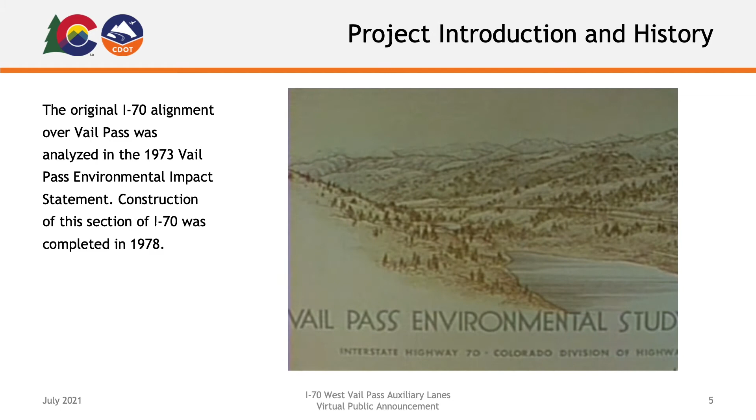The original I-70 alignment over Vail Pass was analyzed in the 1973 Vail Pass Environmental Impact Statement. Construction of this section of I-70 was completed in 1978.

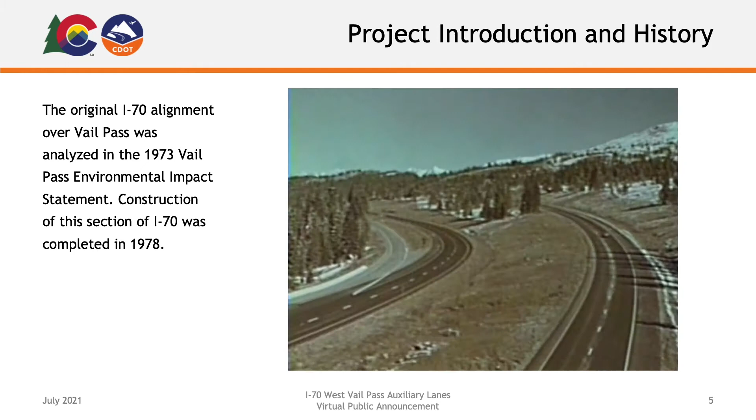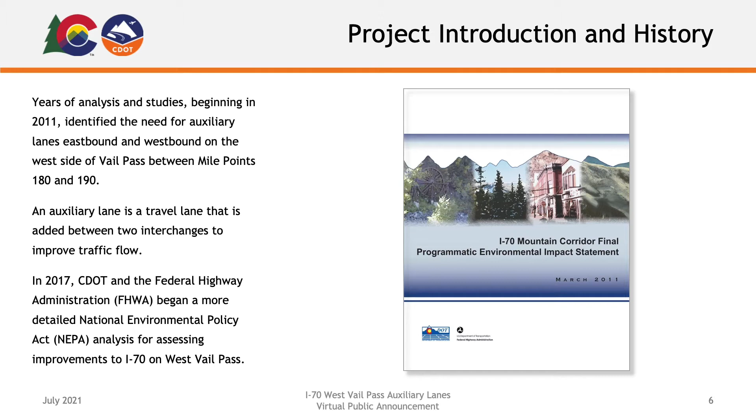Years of analysis and studies, beginning in 2011, identified the need for auxiliary lanes eastbound and westbound on the west side of Vail Pass, between milepoints 180 and 190. An auxiliary lane is a travel lane that is added between two interchanges to improve traffic flow.

In 2017, CDOT and the Federal Highway Administration (FHWA) began a more detailed National Environmental Policy Act (NEPA) analysis for assessing improvements to I-70 on West Vail Pass.

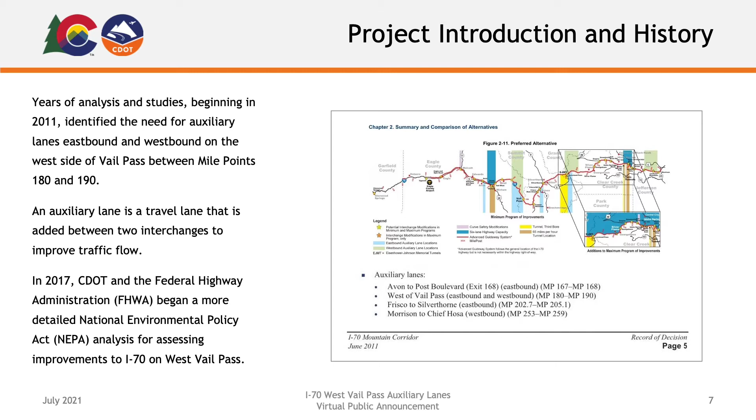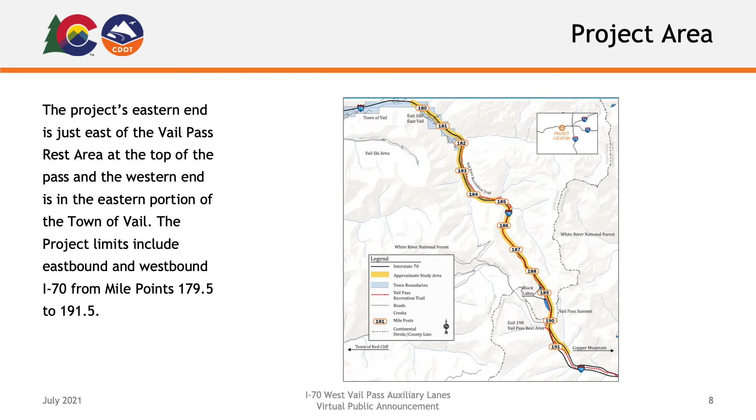The project's eastern end is just east of the Vail Pass rest area at the top of the pass, and the western end is in the eastern portion of the town of Vail. The project limits include eastbound and westbound I-70 from milepoints 179.5 to 191.5.

The project context statement and core values helped us to frame the unique conditions of the project, as well as the concerns and values to be considered during the environmental assessment (EA) and future decision-making.

This context statement was based on the original Mountain Corridor context statement and was further developed for this project through a robust process with project group members, resource agencies, and community members. The context statement captures in words the special qualities and attributes that uniquely define Vail Pass.

The project purpose and need statement was developed based on the I-70 final PEIS purpose and need, which identified safety and mobility issues on West Vail Pass related to speed differences between different types of vehicles, such as cars and freight operators or other slower moving vehicles.

The purpose of the project is to improve safety and operations on eastbound and westbound I-70 at West Vail Pass. Operations, as defined here, means how well traffic flows through an area, which can be affected by the number of cars and trucks, weather, curves, steepness of the road, and other features.

This project is needed to address safety and operational issues such as crashes, road closures due to crashes and weather, and passenger vehicles being stuck behind semi-trucks.

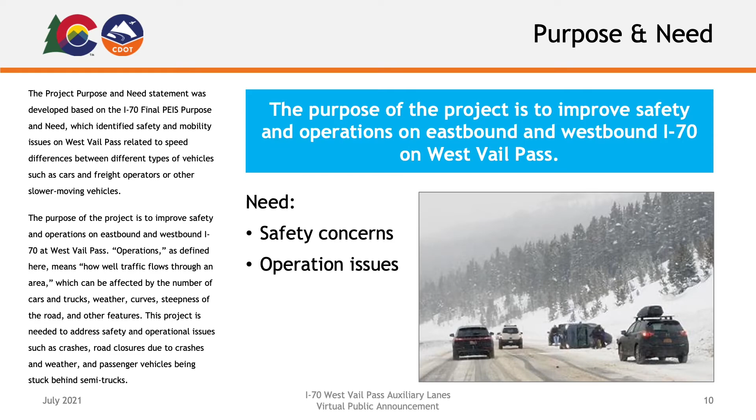In June 2020, CDOT was awarded a federal Infrastructure for Rebuilding America (INFRA) grant. This, combined with other funding sources, will allow for construction of the first phase of the project, totaling $140.4 million.

The INFRA grant, applied for in coordination with the Intermountain Gunnison Valley, Northwest Transportation Planning Regions, and the Grand Valley Metropolitan Planning Organization, will facilitate work on the areas of highest crash rates and greatest operational challenges.

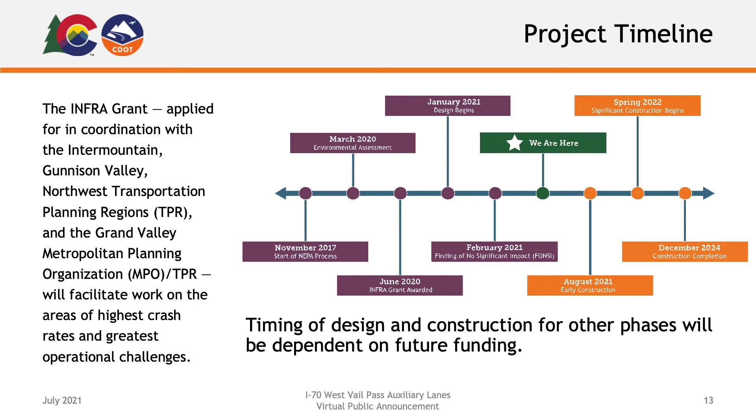Design of the Infrastructure for Rebuilding America (INFRA) grant improvements started in early 2021 on the West Vail Pass Auxiliary Lanes project that have identified funding.

These Phase 1 improvements include an eastbound I-70 auxiliary lane with widened shoulders between milepoints 185 and 190, westbound curve modifications with widened shoulders at milepoints 186 and 188, bridge replacement at eastbound milepoint 185.3, truck ramp reconstruction

at milepoint 182, highway closure system, 6 wildlife underpasses and fencing, 2 miles of Vail Pass recreational trail relocation between milepoints 185 and 187, improved signage and incorporation of an active traffic management system and variable speed limit signs across the entire project area.

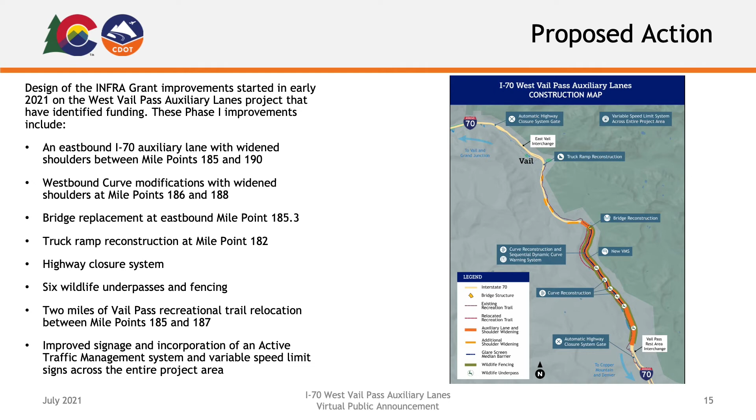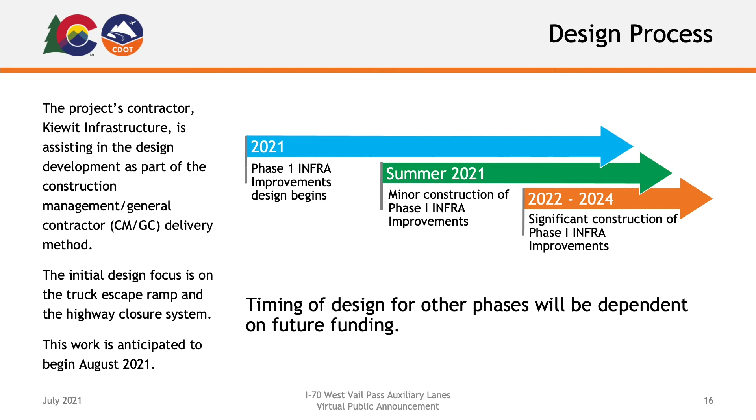The project's contractor, Kiewit Infrastructure, is assisting in the design development as part of the Construction Management General Contractor (CMGC) delivery method. The initial design focus is on the truck escape ramp and the highway closure system. This work is anticipated to begin August 2021.

As design and construction activities begin, CDOT, along with the design and contractor teams, will uphold the obligations and mitigation strategies developed throughout the CSS process and captured in the finding of no significant impacts.

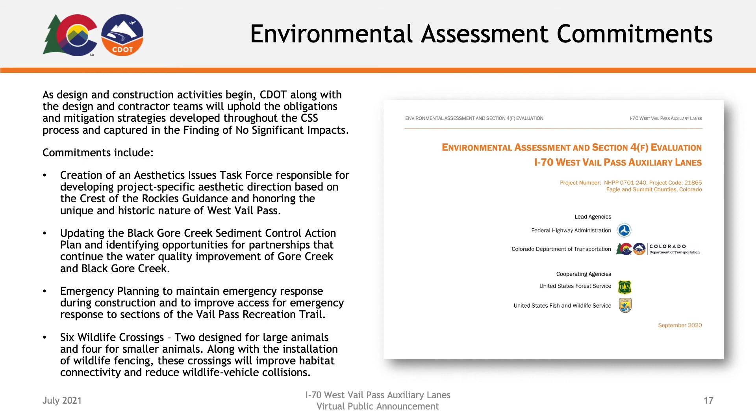Commitments include creation of an aesthetics issues task force responsible for developing project-specific aesthetic direction based on the Crest of the Rockies guidance and honoring the unique and historic nature of West Vail Pass, updating the Black Gore Creek Sediment

Control Action Plan and identifying opportunities for partnerships that continue the water quality improvement of Gore Creek and Black Gore Creek, emergency planning to maintain emergency response during construction and to improve access for emergency response to sections of the

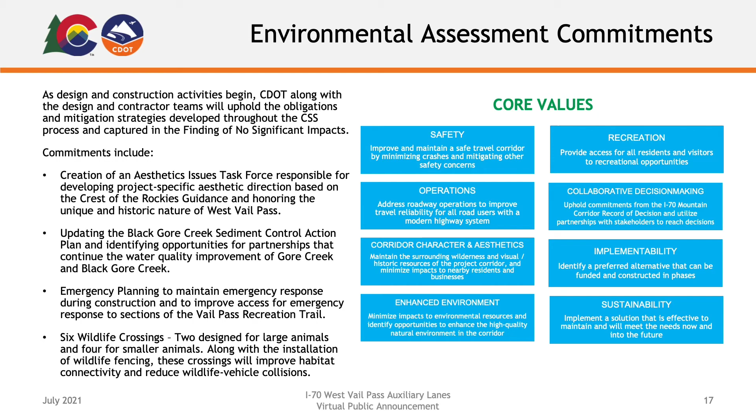Vail Pass Recreation Trail, 6 wildlife crossings, 2 designed for large animals and 4 for smaller animals. Along with the installation of wildlife fencing, these crossings will improve habitat connectivity and reduce wildlife vehicle collisions.

Minor construction activities that should have little effect on I-70 traffic are scheduled to begin in August 2021. These initial construction activities will focus on reconstructing the truck ramp near milepoint 182 just east of Vail and installing a highway closure system near milepoint 190 at the top of Vail Pass.

The truck ramp will be closed during construction this summer and fall and is expected to reopen by the end of 2021. The recreation trail will remain open. Construction flaggers will direct trail users to help maintain a safe buffer between construction.

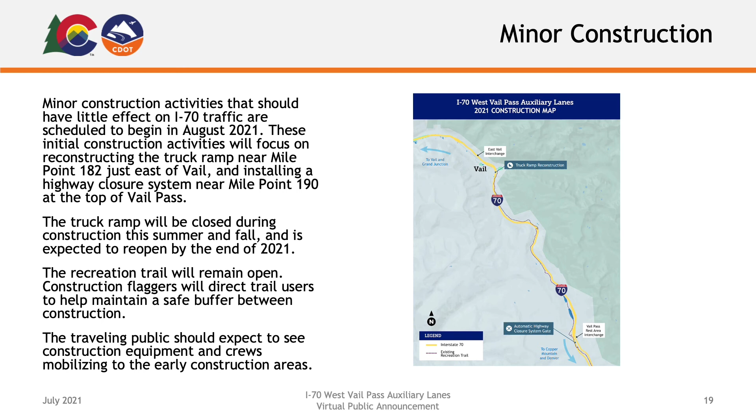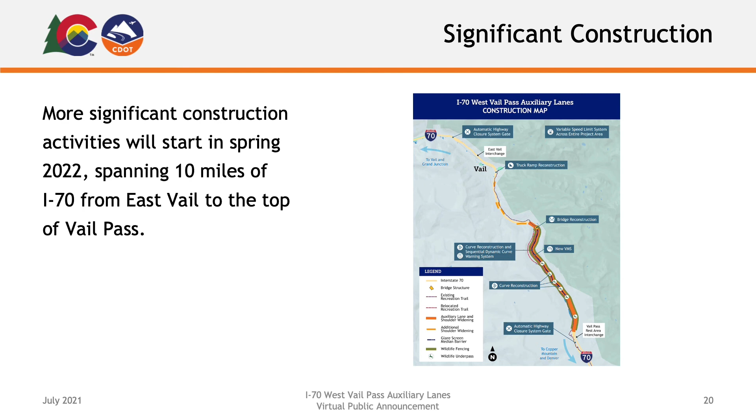The traveling public should expect to see construction equipment and crews mobilizing to the early construction areas. More significant construction activities will start in spring 2022, spanning 10 miles of I-70 from East Vail to the top of Vail Pass.